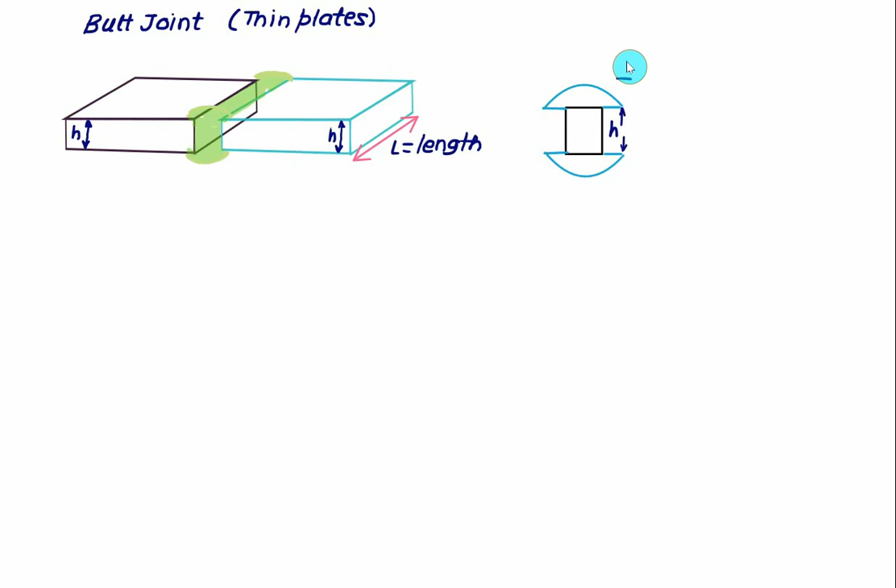Here also we have reinforcement done, and this reinforcement is for filler material. The enlarged view of this figure is shown here. We have throat height equal to H and reinforcement height equal to HR. This bottom portion and top portion is called reinforcement. This hatch area is called reinforcement; after you do the welding you can remove this, but it will develop stress concentration, so you have to grind off this.

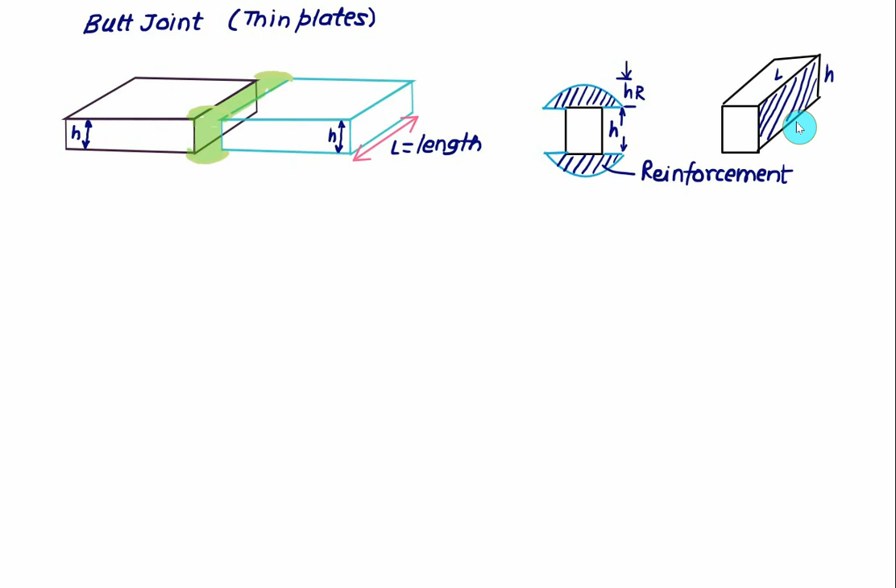If you remove the reinforcement, then the resisting area will be equal to this hatch area, which has a height equal to H and length equal to L. This time the gap is sufficient that the filler and parent material will fuse inside the gap. So this area is called the resisting area, equal to H multiplied by L.

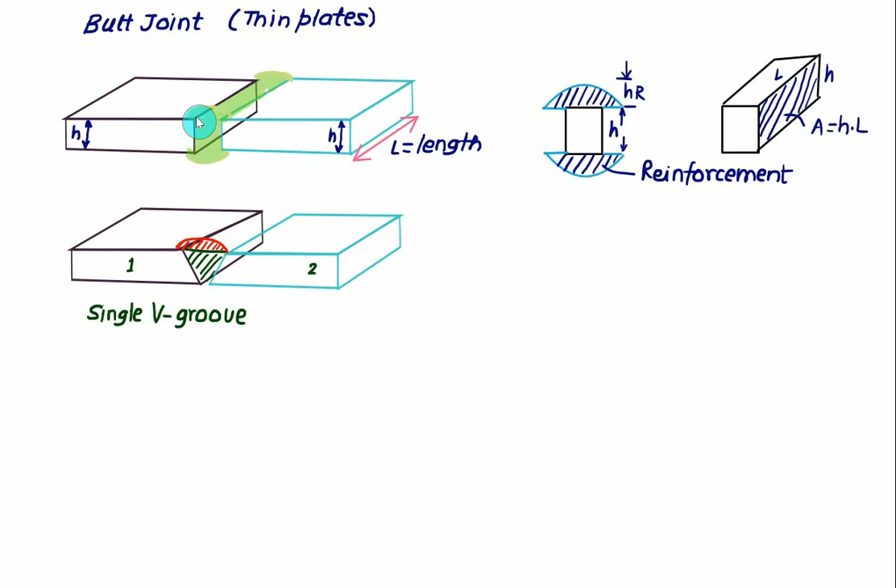But if we make a single V groove, we have to make a groove initially, and then the filler material will fill the gap between plate 1 and plate 2. But again the reinforcement will be developed here, though only on the top side. You don't have to grind it from the bottom, only from the top. So this is the idea about the butt joint in the case of thin plate.

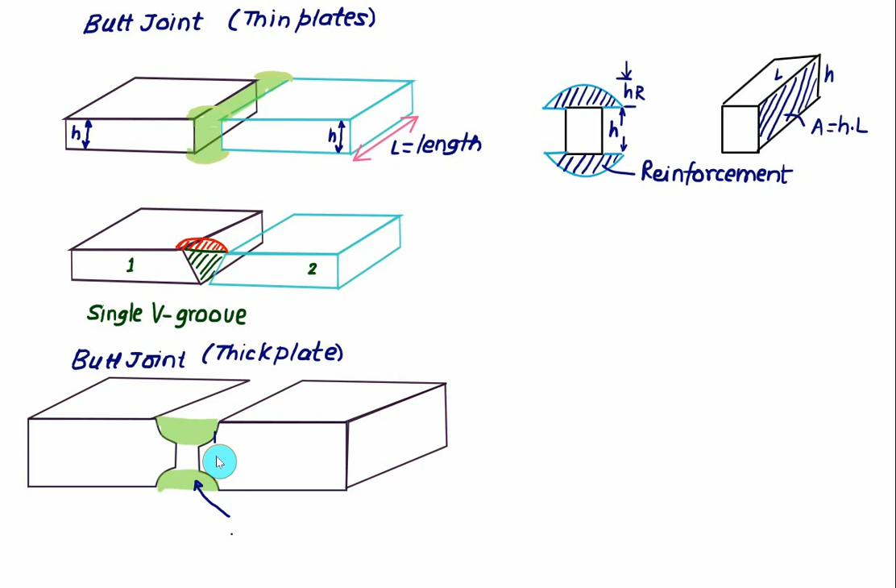But suppose you have to weld two thick plates as shown in this figure, then you have to make the double V groove or double U groove. The filler material will be filled inside the U shape on the top as well as the U shape in the bottom. In this space we will find the fusion of the parent material as well as electrode. This is the fusion of parent material and the filler, but this gap is small here, so filler material will not enter into this small space.

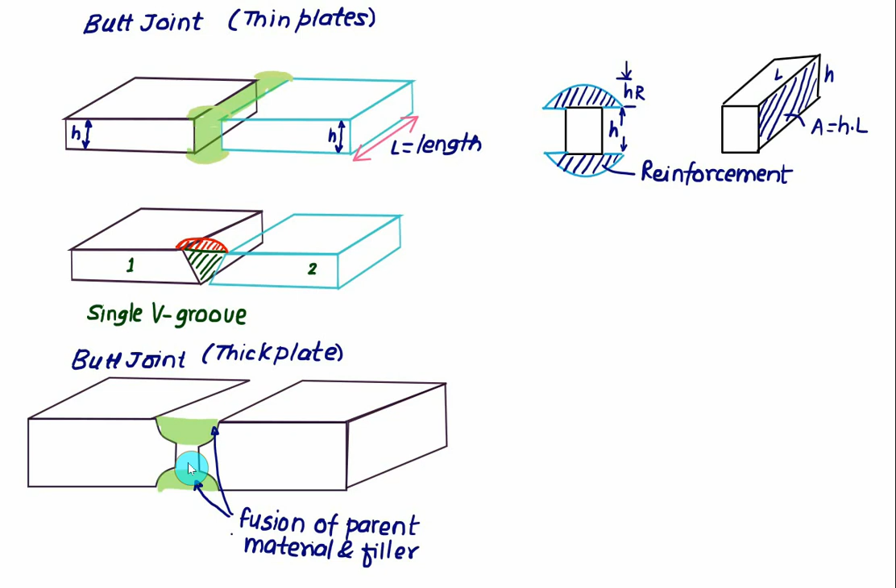So near the throat section we will find the fusion of parent material. This part of fusion, of parent material plus filler or electrode, and the bottom part of the filler and parent material, will give resistance to external forces. So this time we have H, the effective throat, equal to H1 plus H2. Now this space here will not participate in the resistance, that is the fusion of only parent material.

So the effective height in this case is H1 plus H2. If H prime here is the thickness of the plate, then H prime will be equal to H1 plus H2 plus distance D. So we can calculate H as H1 plus H2, or we can calculate it as H prime minus D.

So while going for the thick plate, you don't have to consider the area formed at the throat; you have to neglect that area. In this case, the area will be equal to H multiplied by L, where H is called the effective throat height. Whereas in the case of the thin plate, our effective area is equal to H multiplied by L.

So we'll consider two cases: one is for thin plate and one is for thick plate. And we'll consider two modes of failure: one is the tensile mode, in which the force F is perpendicular to the given area, and the second case, where the force is parallel to the given area.

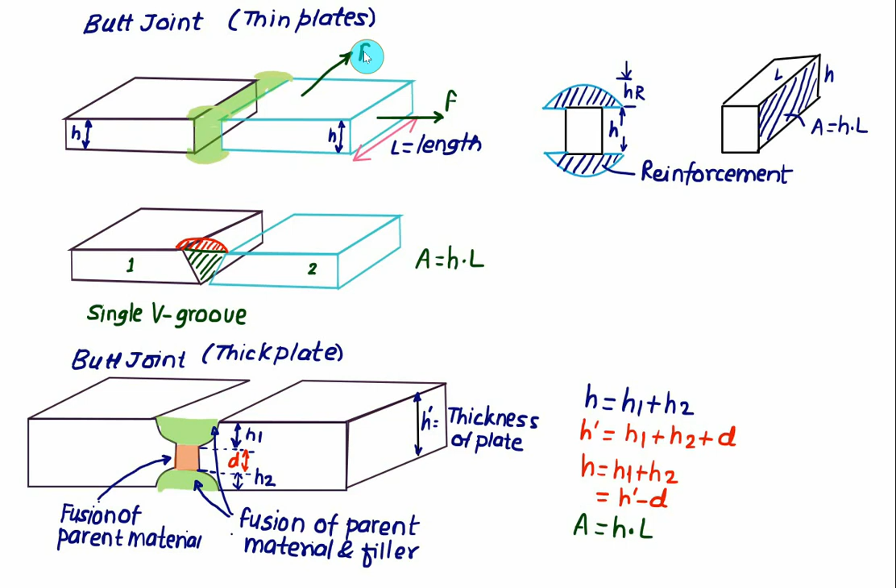Now this time we'll design the butt joint. Butt joint is basically used to join two plates along the edges. This one is plate 1 and this one is plate 2. These two plates are joined at the edges. For this we have to make a groove and then carry out the welding.

Two types of loading is possible. One is called tensile loading. In the case of tensile loading, the force F will act perpendicular to the throat area. This one represents the throat height equal to H and the length of weld equal to L. Some crowning is done here, that is called reinforcement. So the direction of the force is perpendicular to the throat area, which is H multiplied by L.

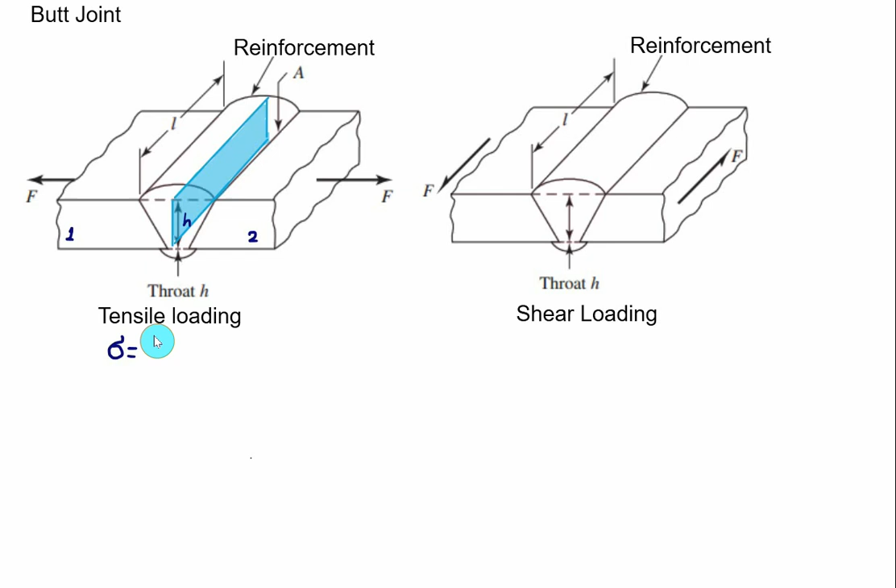In that case, the butt joint will fail under tensile loading, and the corresponding normal stress will be produced, where normal stress sigma, may be tensile or compressive depending upon the direction of force, is given as F divided by H multiplied by L, where H is called the weld throat and L is called the length of the weld. So the crown portion that you visualize here is called reinforcement.

That is, this crown portion that you visualize is a reinforcement. So while calculating the area, only the weld throat is considered, that is the height H is considered. The height of the reinforcement is not considered. Here the height of the reinforcement will be equal to HR.

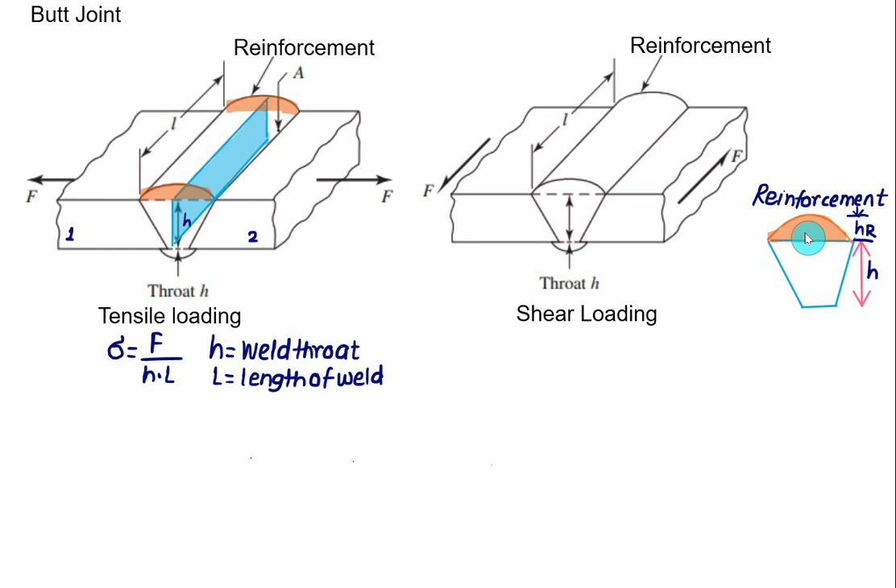Once we do the welding, there is a stress concentration formed at a point A. But during the welding, the reinforcement is normally grinded off as it causes the stress concentration. Reinforcement is done during welding to compensate the strength of the weld in the presence of weld defects. So the reinforcement is desirable, but it varies somewhat and thus produces the stress concentration at point A.

If the fatigue load exists, it's a good practice to grind or machine off the reinforcement. So while grinding or machining the reinforcement, you have to take care that it should flush with the weld throat height equal to H.

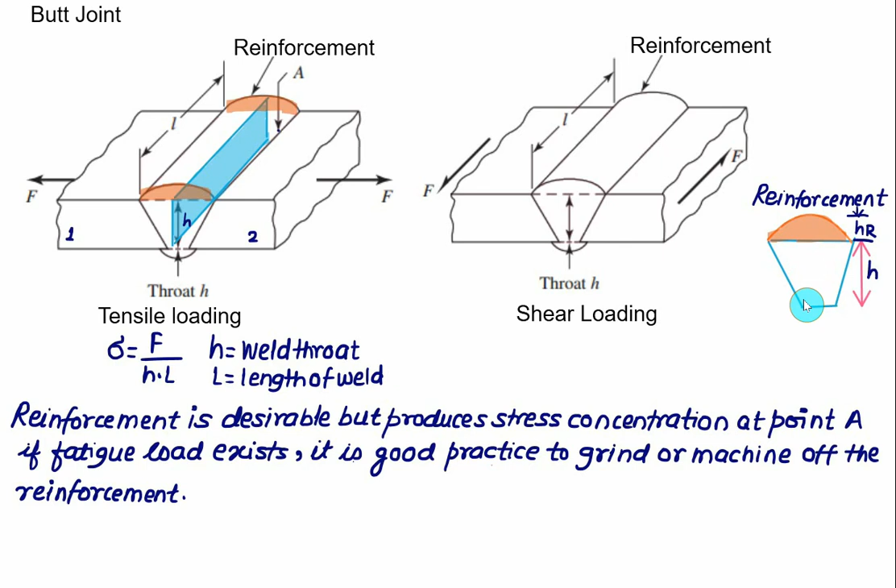But if undercut is done, that is the reinforcement is removed and some undercut is done, then the actual area resisting will decrease. This figure again represents the reinforcement with height equal to HR, but if we have improper selection of the welding parameters, then there is an undercut. During the undercut, the height of the weld throat will decrease.

So this time we have effective weld throat equal to H minus D, and therefore sigma this time will be equal to F divided by the effective height, which is H minus D multiplied by length of weld equal to L. So if there is an undercut, the effective height of the throat will decrease, and you have to take the effect of decrease in height as H minus D, and then you can calculate the value of sigma. The allowable stress in the case of butt joint is based on ultimate strength.

So sigma allowable is always equal to SUT divided by the factor of safety, and this value of sigma should always be less than sigma allowable.

If in the numerical there is no mention of undercut, the throat area will be H multiplied by L, and if we have undercut, the throat area will be H minus D multiplied by L. So this time the throat area is perpendicular to the direction of the force F, and therefore we have tensile loading. If the direction of force is reverse, it's compressive loading, but the magnitude of the stress remains same as F upon H into L.

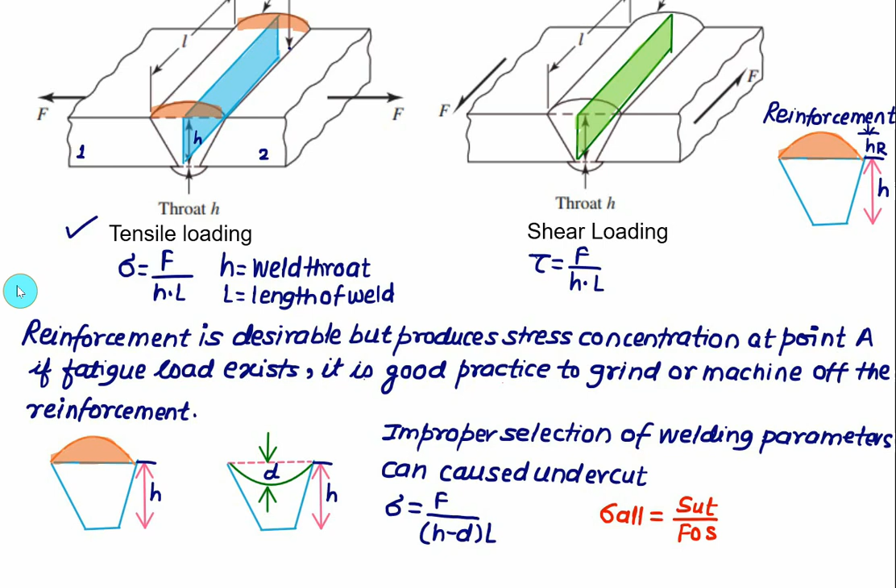So by default you have to always consider tensile loading. So we have clearly two distinctions here. In the first case we have throat area perpendicular to the direction of force F, and in the second case, that is shear loading, the throat area is parallel to the direction of force.

So in the case of tensile loading, if no undercut is done, the normal stress produced, that is the tensile stress, is given by F upon H into L. And if undercut is done, the normal stress produced will be equal to F upon H minus D, where D represents the depth of undercut and L represents the length of weld.

But it may be possible that the welding is done for two unequal thickness plates. In that case we have to select the minimum value of the thickness. So the thickness of this plate is T, as well as the thickness of this other plate is also equal to T. So in this case the thickness of the plate T is same as equal to H, the throat height.

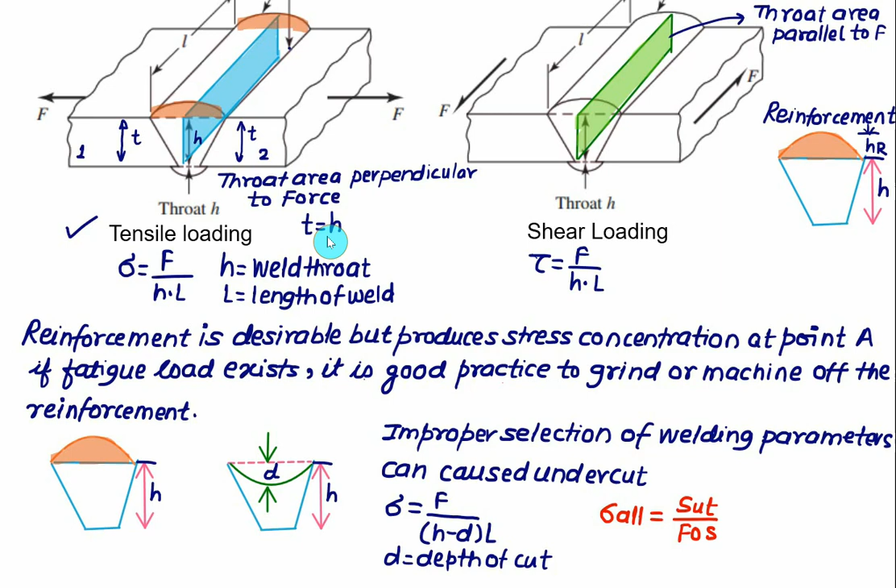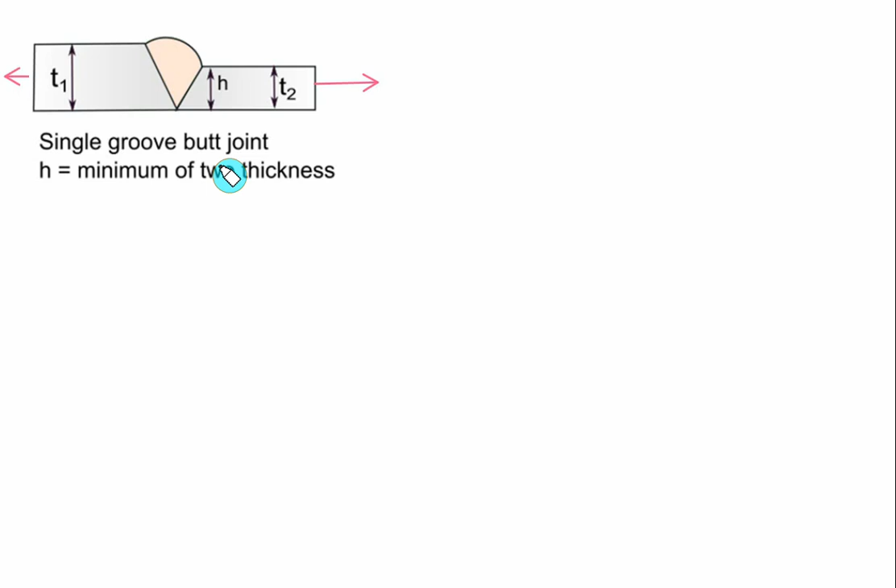Now this one is also a groove butt joint, but we have two different thicknesses of the plate. One is T1 and one is T2. In that case, you have to select the minimum value of T1 and T2 as the throat thickness. So this joint also fails under tension.

This time we have to select the value of H as the minimum value of T1 or T2. Therefore, the throat area will be equal to H multiplied by L, which is the area of the throat. And the normal stress produced, sigma, is equal to F divided by area A.

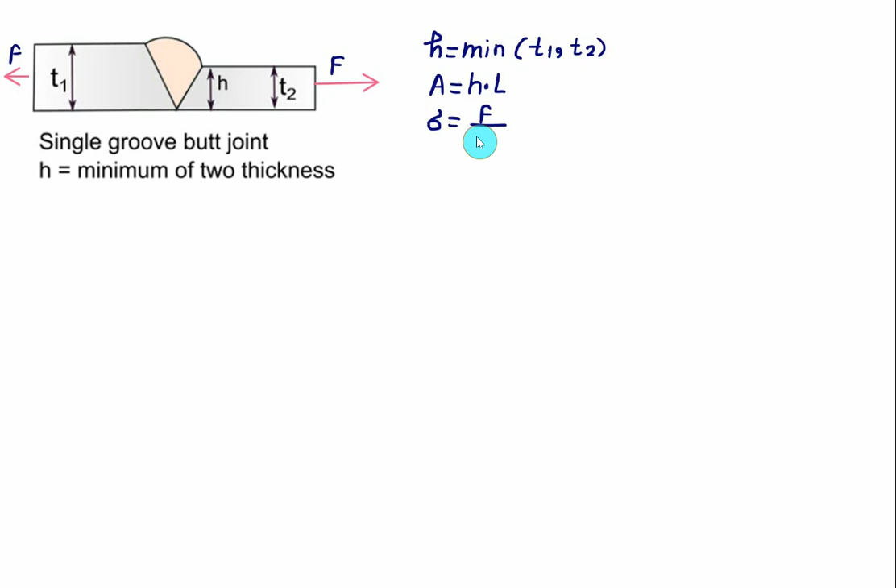As discussed initially, in the case of a thick plate, we are going to use the double V joint. Here the total thickness T consists of one V groove with height H1, and the other V groove equal to H2. This part is shown with negligible area because it's filled with the parent material, and this part is filled with parent material plus electrode. So you only have to consider the height H1 plus H2.

So in the case of a double groove joint, H is equal to H1 plus H2, which is the same as the thickness of the plate minus the distance D. If you apply force F, you can calculate the tensile stress sigma, equal to F divided by area. In this case, take the area as H multiplied by L. These are the cases required for a groove butt joint.

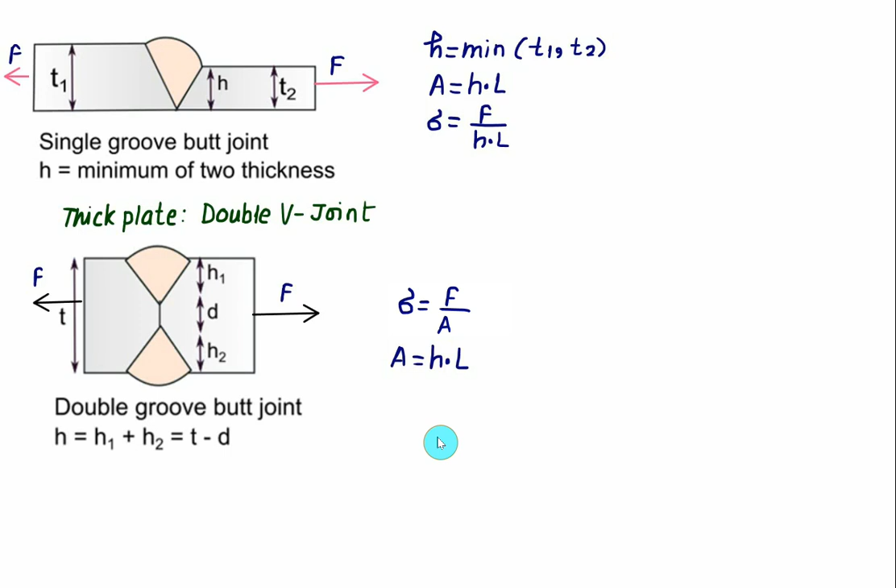The permissible tensile stress in a butt weld joint is 85 Newton per mm square. Since it's tensile, failure is to be considered under tension. With a weld length of 50 mm, determine the maximum allowable force that can be applied to the plate.

We have to consider two cases. In the first case, we have a single butt joint with plate thickness equal to 12 mm. In the second case, we have a double groove butt joint of plate thickness equal to 20 mm, with the distance between the two grooves equal to 8 mm.

Let's solve the first part, where we have a single butt joint with plate thickness equal to 12, weld length equal to 50, and sigma equal to 85. So we have thickness H equal to 12 mm, length equal to 50, and sigma equal to 85. Let F1 be the required force that we want to find, for which the welding will stand.

This failure is due to tension. So F1 is equal to the normal stress sigma multiplied by the resisting area, H multiplied by L. Normal stress is 85 Newton per mm square, and H into L is also in mm square, so mm square cancels. Thickness equals 12, same as throat height, and length of weld equals 50. So the answer will be in Newton.

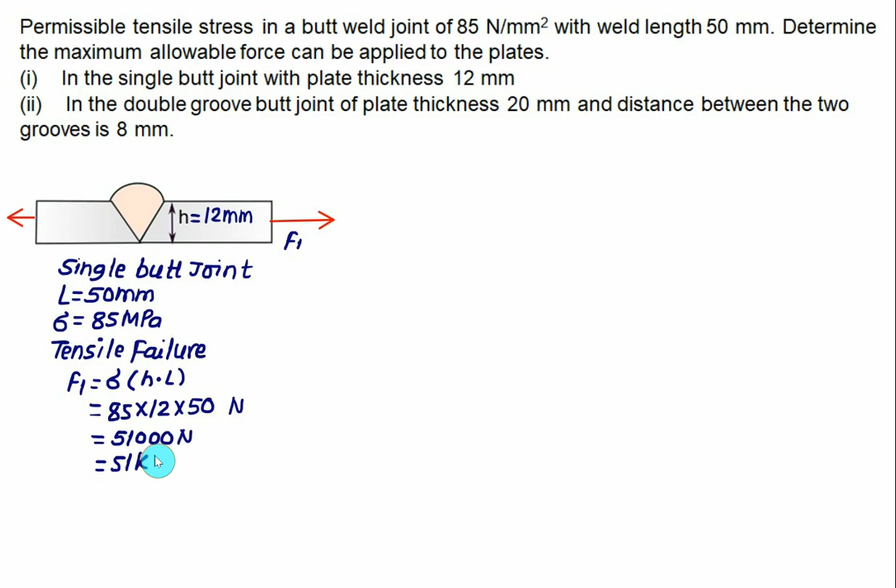In the second part, consider the double groove butt joint with plate thickness equal to 20 mm. So T is equal to 20 mm, and the distance between groove 1 and groove 2, that is D, is equal to 8 mm. Suppose this double groove joint withstands a force equal to F2.

In this case, the effective throat height H is equal to T minus D, which is the same as H1 plus H2. So T is 20 minus D is 8, giving an effective height equal to 12 mm. That's the same as the previous value of H, so we are getting the same force here.

Let's calculate: F2 is equal to sigma multiplied by throat area, that is H into L. Sigma is 85, throat is 12, length of weld is 50. So this answer is also equal to 51 kilonewton. Both the single butt joint and the double butt joint will withstand a force equal to 51 kilonewton.

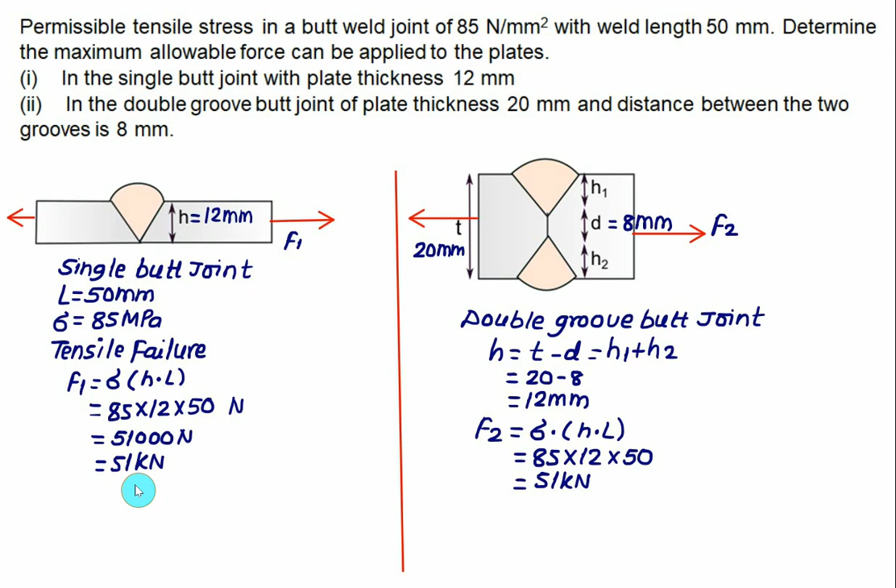Two plates are joined by means of a single V butt joint having a throat thickness of 200 mm. What will be the percentage change in the tensile strength, that is F1 and F2 of the butt joint, if the plates are joined by means of a double V butt joint having throat thickness at the top equal to 200 and bottom thickness H1 and H2 given for the double V groove joint. Other parameters remain unchanged, meaning the value of sigma and the length of weld remain the same.

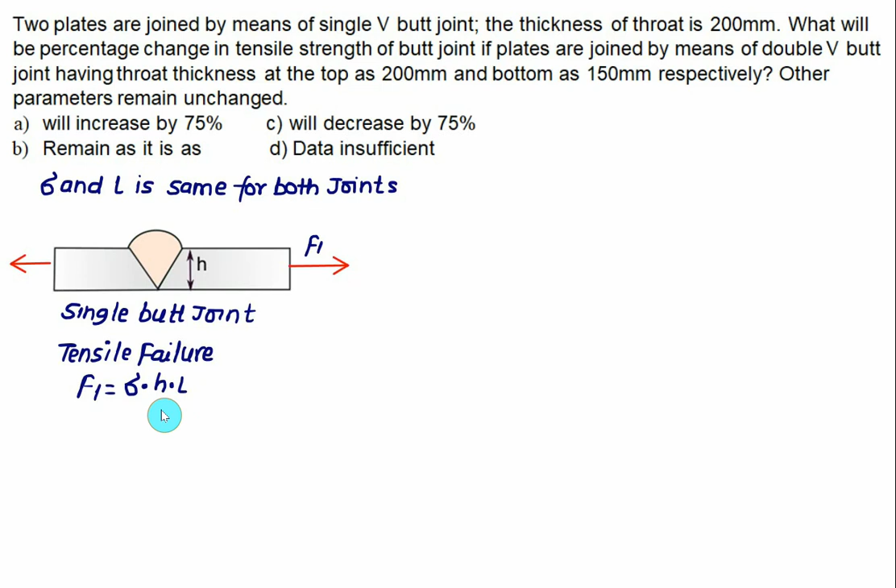Let's consider a single V butt joint, and let the resisting force be F1 for the single butt joint. Since failure is tensile, F1 equals sigma multiplied by height h multiplied by length L. In the first case, for the single V butt joint, the throat thickness is 200, so h equals 200. We can calculate F1 as 200 times sigma multiplied by length L, which is the weld length.

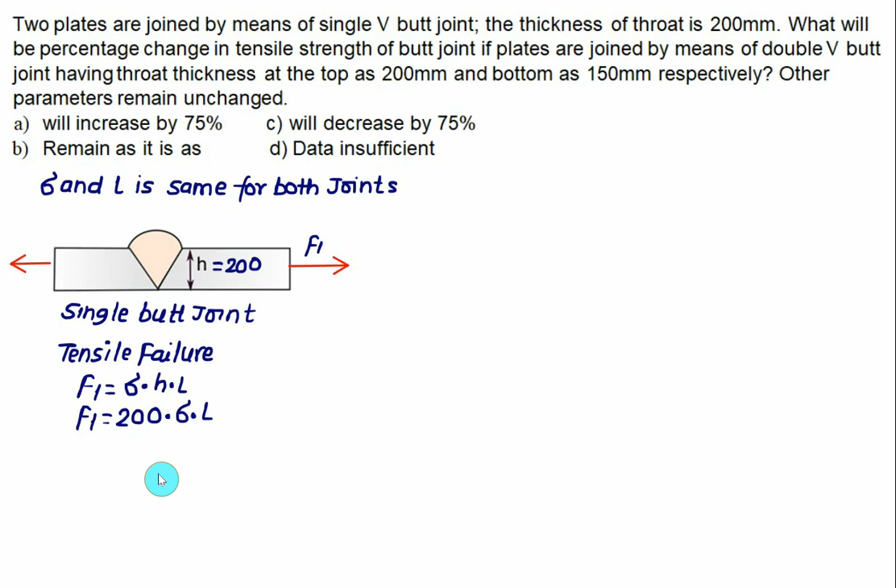In the second case, we use the double V butt joint, with throat thickness at the top H1 given as 200 mm and at the bottom H2 equal to 150 mm. We know the value of D will not contribute to the resisting area, so the effective height H equals H1 plus H2, where H1 is 200 and H2 is 150, giving 350 mm.

Let F2 be the force resisted in the case of the double V groove joint. So F2 again equals sigma, which remains the same in both cases, and length of weld also remains the same, multiplied by h. This time you use h equal to 350. So F2 equals 350 multiplied by sigma multiplied by L.

What we want to know is the percentage change in tensile strength of the butt joint, F1, if the plates are joined by means of double V. The percentage change: since F2 is the higher value, we have F2 minus F1, compared with the original value F1, multiplied by 100. Sigma into L gets cancelled, giving us 350 minus 200 divided by 200, again multiplied by 100. So we get 150 divided by 200, which is close to 75%.

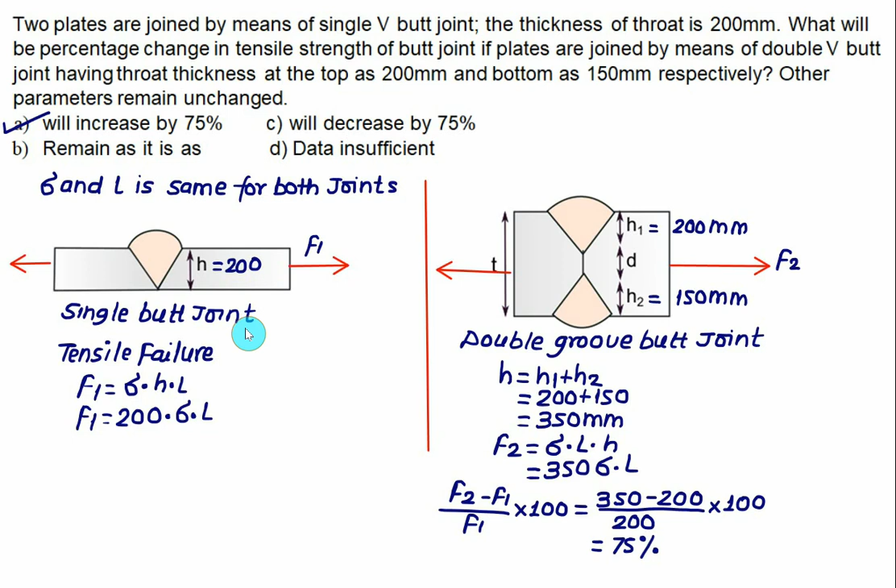So it will increase by 75%, so choice A is correct. Hence for large thickness we have to use the double V groove butt joint, and for small thickness we have to use the single V butt joint.

A butt weld joint is developed on a steel plate having a yield and ultimate tensile strength of 500 and 700. The design of a butt joint in tension is based on the yield strength and not on ultimate strength. The thickness of the plate is 8 mm and the width is equal to 20 mm. Width is taken as same as the length of weld. Improper selection of the welding parameter causes an undercut of 3 mm depth along the weld.

We need the maximum transverse tensile load. The butt joint in tension is based on the yield strength, so the value of sigma is the same as SYT equal to 500 megapascal. We are given the thickness of the plate, H equal to 8 mm, the undercut D equal to 3 mm, and the length same as the width equal to 20 mm.

So in this case, the effective area of the throat will be equal to H minus D, that is the undercut, multiplied by the length of weld L. So the maximum force that can be resisted by a butt will equal the area multiplied by sigma value. Area is H minus D multiplied by L multiplied by sigma, equal to SYT. Here H is 8, D is 3, length of weld is 20, and sigma is SYT equal to 500.